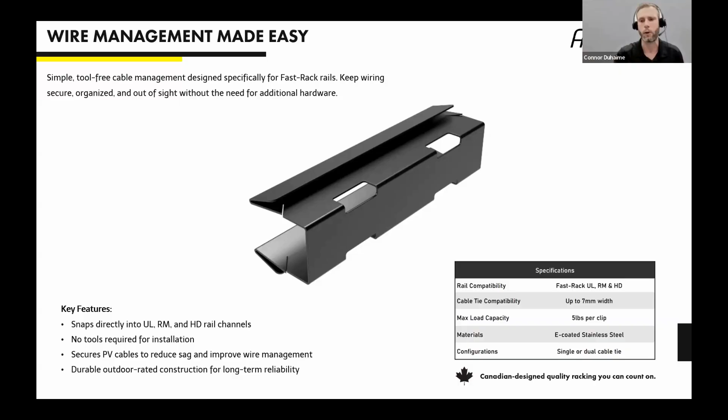One of the benefits to this is if you're zip tying right around the whole perimeter of the rail, that works just great, but it's really hard to get that zip tie super snug all the way around because you've got a square or rectangular shaped rail and you have to tighten it on, so you've got more wiggle room for the cable to move up and down. What this allows you to do is get a super tight tie right around the cables, and it keeps it right in line in position on the side of the rail. So again, it's kind of familiar—you're using zip ties, a typical sort of installation—but with the added benefit that it stays right in place and is a little more secure.

Okay, like I say, this one's pretty quick and simple. I'll pause. I don't know if there's any questions in there, Stanko, you want to hit on.

It was just a comment from Joseph. Unfortunately, he bought a couple of the spacer tools, and one of them broke on his first job. Thank you for the feedback. Maybe we can connect offline and talk about how exactly it broke—did it get dropped or whatever? Because you're right, it's 3D printed material. If you drop it off a roof onto a sidewalk, it's probably going to break. But we'd like to hear more about the context around that, how that happened.

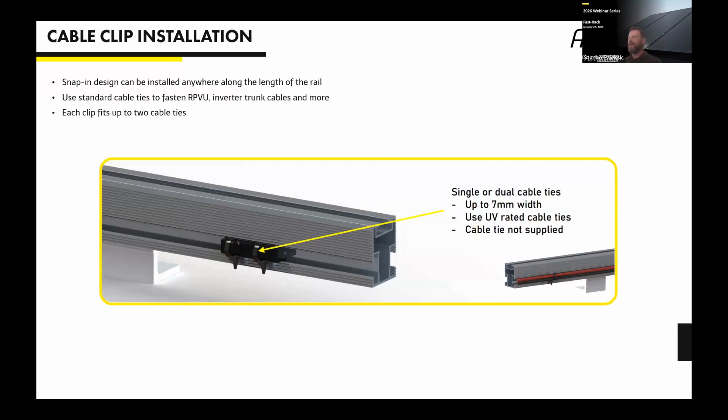So this is what it looks like. This is a 3D printed part, as Stanko mentioned. There's a couple of reasons why we did that. One, it keeps it simple and easy to produce. Secondly, it allows us to make changes in the future—we may tweak this based on user feedback, that kind of thing—so we could rapidly deploy these and get lots of them out. But as you can see, it's kind of a cross-shaped design, with two webs on it that sit in between the modules.

So what that's going to do is set that gap in between your modules, specifically the row spacing, or the vertical between rows—I'll explain exactly what I mean by that. But really the goal of this tool is to make it super easy to lay out your modules and make them clean and aligned. It reduces sawtoothing and alignment inconsistencies. Sawtoothing is when that first module is just a little bit crooked, maybe not aligned with the edge of your roof, and then to maintain that straight row, you end up with them all staggered or sawtoothed, and it doesn't look good—it means you're going back and adjusting. So the goal of this tool is to help prevent those pain points and make it easier to align your arrays.

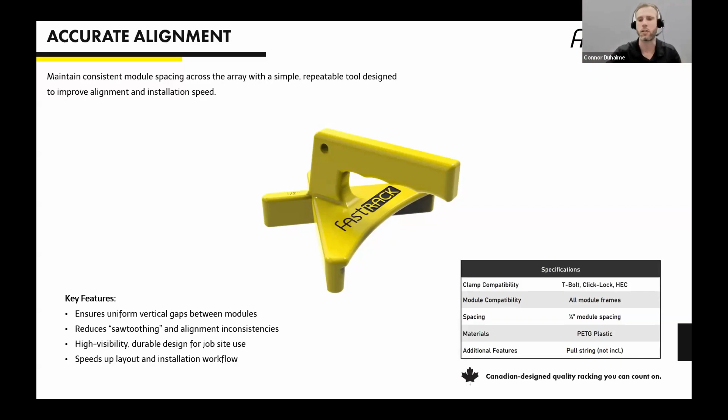You'll notice there's a hole in the top of the handle. It doesn't come with a string, but if you choose to, you can install a pull string through that. I might recommend that, we found it really great in testing. As you use these and you're reaching over to remove it, being able to pull that from a string might just make your life a little bit easier. So that's what that's there for.

A little bit more on how it works. It's got kind of a web design, you see that web on the top. It's designed to sit on top of the PV module, so it's not going to fall through. You don't need to hold it into place. Even on a sloped roof, it's going to stay hooked over top of the corner of the module.

One important caveat that's maybe not clear off the get-go: really the goal is for aligning your rows and keeping things square. Your vertical gaps, or where your module clamps are going to be situated, those are not necessarily going to be set by the spacer tool. They're going to be set by the module clamps.

And that's intentional because our clamps actually have varying thicknesses. Our T-bolt clamp is a little over half an inch wide, and our Click-Lock clamp is a little wider at like 0.6 or 0.7 inch wide. So as you install your clamps, that's actually what's going to set your spacing between modules horizontally. Once you've got those on, you put the spacer tool in, and your next module can just drop down, and it'll set that row space. Since you're going to be installing the module clamps anyways, they're always going to dictate that space.

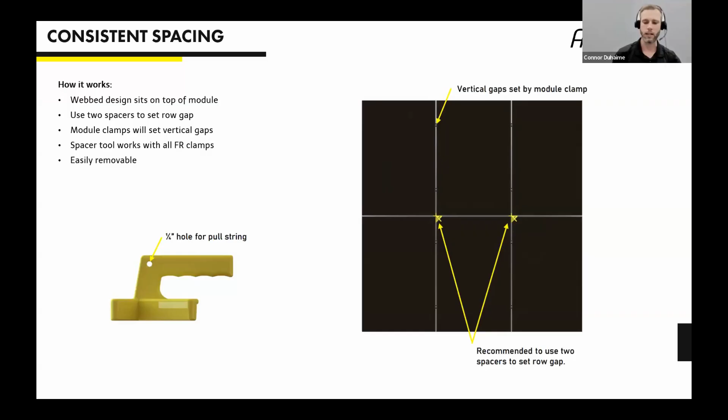Okay, so moving ahead, this one to me is the most exciting of the bunch. So this is our Fast-Rack Edge trim, our latest Critter Guard, Rodent Guard solution.

There's really two key components I want to introduce. The first, and this is really where the magic happens in my opinion, is the Fast-Rack Edge clamp. This is a brand new clamp designed to attach the trim to the edges of your module. The way this works, it's a pretty simple clamp mechanism, but there's two pieces to it. They slide together and clamp right around the module frame. This is an aluminum clamp.

It's black anodized, so it's going to look really nice. It's going to hide in behind the trim. It's super solid and robust. It's not going to unclip, it's not going to break. It's a solid aluminum piece, and what's really important here is it's got a universal fit for flanged and non-flanged modules.

I've got a couple slides where I'll get into that in more detail. But it's a faster install than traditional J-hook systems. You can clip these on, it's just a little bit easier, a little friendlier. You don't need to snip them off or any of that. They're certainly more secure than a J-hook system.

The hardware on it is all stainless steel. We use a nice square Robertson bit, same as you're going to use for the Fast-Rack Talon. As Canadians, we love to use our Robertson bits, so we kept it that way on purpose. And then lastly, maybe one of the key points of this clamp is it's a reusable design for maintenance and servicing. You can take it on, take it off, remove it, unlike a J-hook where generally if you're going to take it off, it's got to be disposed and replaced. You can take this off, you can adjust it, so that makes it really easy.

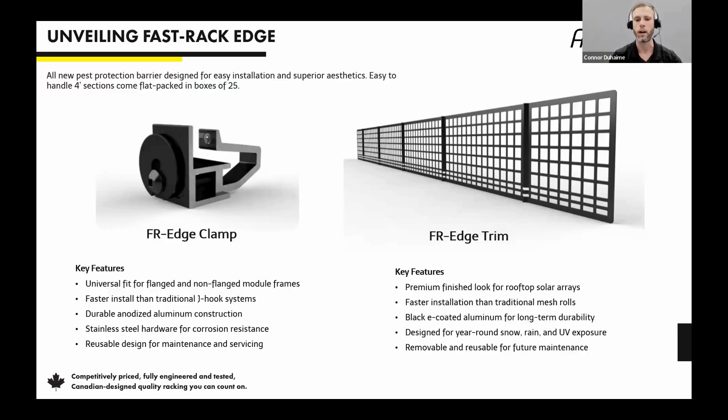So you need to go in, replace a module or get to a microinverter or whatever you happen to be doing, super easy. Unbolt a couple pieces of the trim, go in there, do your maintenance, and then pop it right back on. You don't need to buy new parts, you don't need to peel anything off or break any clamps or whatnot. You just unbolt it and bolt it back on.

So as far as installation, I've got a couple slides here about the clamp itself. It was really important when we designed this that it was universal for flanged and non-flanged module frames. What I mean by that is the bolting flange on the bottom of the module. As many of you have probably experienced, most of the new modules out these days, the short side of the module frame typically doesn't have that bolting flange underneath.

Again, with the universal theme, module thickness is going to have no impact on this either. It can be a 30 mil, 40 mil, 50 mil, you name it. It's going to clamp onto the module just fine.

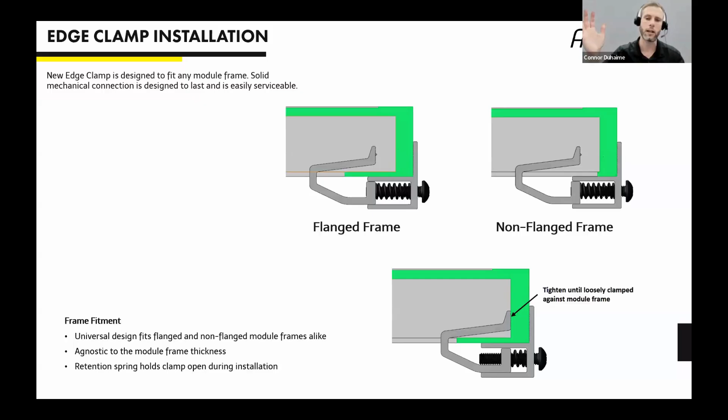You'll also notice there's a small spring on the inside of this. This is actually a key piece of the way that it functions. What that spring does is hold the two pieces apart, so it makes it easy to use. You don't have kind of a flopsy clamp - it stays rigid in the open position. That allows you to easily hook it onto the module, and then as you tighten it, everything compresses and it secures in place.

Once you've got your clamps secured to the module, the next step is moving to the trim. It's super simple. Step one: align. You've got your clamp in place, and you're going to notice that on the clamp there is a small screw, pre-installed - it's going to be there when you install it. You're going to position the trim over top of that screw, and that screw is going to come through and can go through any of the perforations on the trim. That's what's really great about this.

There's tons of locations where you can mount, so it makes it really easy, adjustable. There's no dedicated holes - you've got a lot of freedom when it comes to installing the clamps. There is some minimum spacing that we recommend, so I'll show you how that works. But again, it's very, very easy to align.

To secure it in place, it comes with slotted washers. These are going to come separately in a little bag on the side. You just slide that over top of this screw - again, you don't need to remove that screw, it's already going to be installed on the clamp. You just slide the slotted washer over the front of the trim and tighten that screw, and now you're locked in place. Then repeat.

As you go to do the next piece, the trim is designed to overlap end to end. You're going to share the last clamp - as you can see here, this is the end of trim number 1 and the start of trim number 2, and they're going to share the same clamp. There's a couple of reasons why we do this. One, it's less pieces - you're using one clamp where otherwise you'd have two. It's also a little bit more secure - it keeps you from ending up with a gap, keeping them overlapped and tight. Again, the goal of this is to keep critters, birds, and rodents out from under your array, so keeping that gap closed is going to help with that.

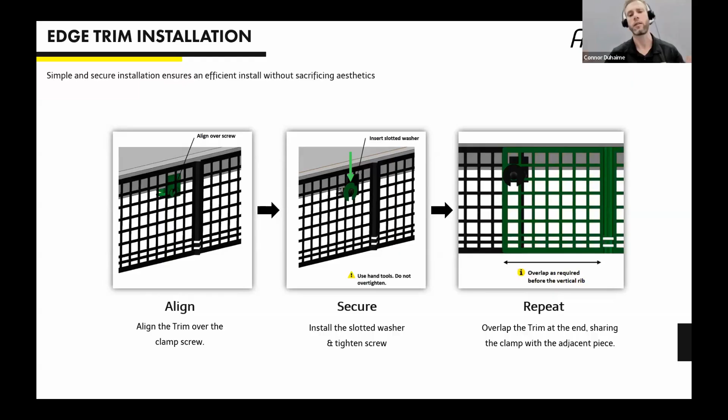Design flexibility - the trim height is optimized for Fast Track Ultra. This is really one of the key points, and I think one of the best things about it is it can be installed, generally speaking, without any cutting or bending on most installations. The height of that trim is designed to fit - so if you're using our Fast Track Ultra system with our L foot, whether you're using the Fast-Rack Talon, or even some other solutions like an RT Mini, it's going to fit perfectly between the roof and the height of the module without trimming or bending. That saves you a ton of time.

Typically, when it comes to using mesh, you're gonna have to go through, fold it almost all the time, and or trim it off - that kind of thing. That just adds a ton of time to your install. There's not a lot of good tools or ways to do it.

So this is again super easy. It just takes a lot of the pain out of the installation of critter guard systems.

Another key point is it's designed to conform to the shape of the roof. As we all know, roofs are typically not flat. They're going to be up and down, and some are going to be better than others, but there are going to be some kind of undulations in the roof. It's very hard to see in this image, but in the top left, there is actually a subtle tilt to that piece of trim. So what that shows is as you install the trim, it can kind of angle up and down a little bit as needed. It always has to remain below the top of the module frame, as you see on the right, but it can be a little bit higher, a little bit lower, as long as it stays within the module frame. That allows you some flexibility to keep it tight against the roof surface and minimize any trimming or bending that may be needed.

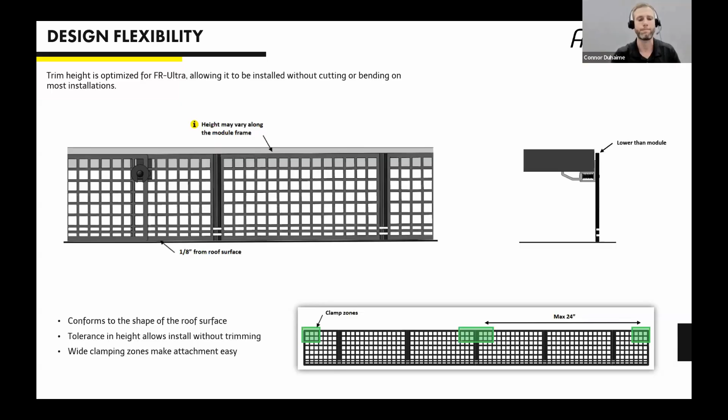Height adjustment, if necessary, I would say so. There are going to be situations where you may need to do bending or trimming or that kind of thing. As I said, we've kind of optimized this so that most of the time you're not going to have to do that, and that's a huge win. But occasionally you might have a situation where you do, and in that case, we tried to make it super easy for that too. So there's a couple of options to make this happen.

You're going to notice on the trim, the bottom 2 rows of perforations are kind of a narrower line. That's intentional, so there's 2 options that I would recommend. Number one is bending. If you want to bend this over, it's super easy, because you've got that line of perforations, you can bend those over, and the distance between them is about 0.3 inches, so you got a little bit of range. If you want to reduce the height a little bit, you could fold over at the bottom line. If you want to take a little more off, bend over on the top line. This is an aluminum piece, it's fairly soft and malleable, so you can literally go down and bend this with your fingers if you want.

What I would recommend is take it to a straight edge, like the edge of a PV module, or if you've got a board or something like that, and you can literally just fold this over. Again, no special tools required, super easy. You get a nice straight bend every time because the perforations are there to guide that fold. It makes that height adjustment super easy compared to other solutions on the market.

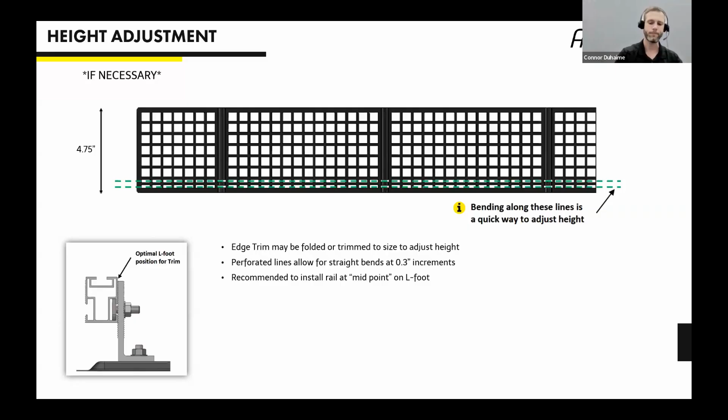But of course, depending on how your array is laid out and where your corners land, you don't have to bend it right in the middle - you can bend it anywhere along the length that you see fit. But the bending is easy.

One thing to note is it's best if you bend along anywhere on the mesh. You'll notice there are solid black stiffener ribs within the trim - it's much harder to bend at that location, and we don't recommend it. It's actually best if you bend it along the perforated section of the trim. It's going to bend super easily. I recommend putting it around something like a straight edge - the module frame or a piece of wood - just to get a nice clean bend. But it's super easy to do, you can just do it with your hands.

For corner sections, the same rule applies as far as clamping zones. You want to have a clamp at either end of the trim, and then one somewhere in that mid zone. It's generally recommended to keep it on the long side, depending on your bend. But as long as you're within that mid zone of the trim, you're going to be good to go.

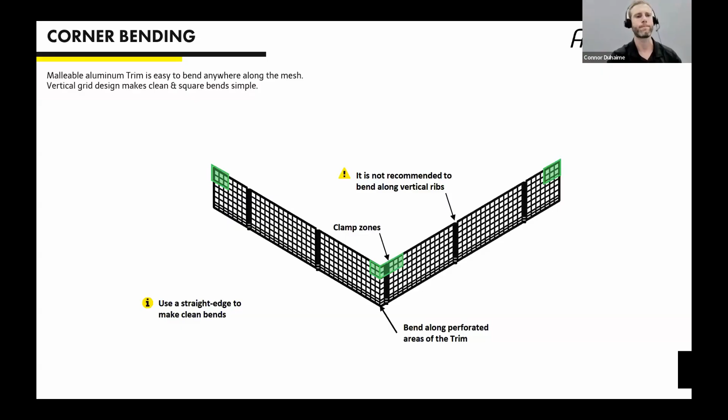If you want to do a hole and pop it through, that's totally fine, whatever works out cleanest for you. It's super easy to trim, since it's kind of that soft aluminum.

One thing I'd give a plug for at this point is the hidden end clamp. It hides underneath the module frame and allows you to trim your rails flush with the end of the module. That's a big win for installing CritterGuard because you don't have rails sticking out, so you won't run into this issue. Two things about it: one, it's easier for installing CritterGuard, and two, your final product is going to look so much better. You won't have to do this notch, you'll get a nice clean trim all the way around. It's going to look awesome.

That said, if you're using standard clamps, no problem. We do sell an end cap too, I think that was our accessory product from last year. That's a good option if you want to make it look slick but still want to use traditional end clamps.

But you do want to keep a tight fit around the rail. We want to keep the rodents out, we don't want large gaps. So try and do a fairly tight cut when you're doing that.

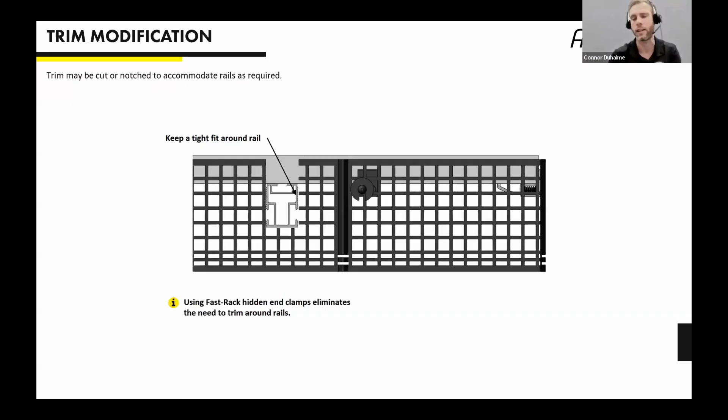Okay, so that concludes my Fast-Rack edge trim, but there's a few more benefits of the clamp that pertain to our existing CritterGuard lineup. We call it the edge fence. We've rebranded this a little bit, but really this is our traditional roll of CritterGuard mesh.

So the new edge clamp is going to work perfectly with the existing mesh as well. As we introduce this new Fast-Rack edge trim, we're not going to discontinue the mesh, we're still going to carry that. If you prefer that product, you're more than welcome to use it. We'll have it available in a 6-inch and an 8-inch height.

It just snaps into place, super easy. That said, it's not as robust, it's just a plastic clip, a little lighter duty. If you're in a really heavy snow region, like I live here in Barrie, Ontario, we got a lot of snow this winter, so I get it—you're going to have snow flying off that array in the middle of winter. The clip might not be your best solution, and that's a location where I would totally install the edge clamp. It's aluminum, it clamps into place, it's much more secure.